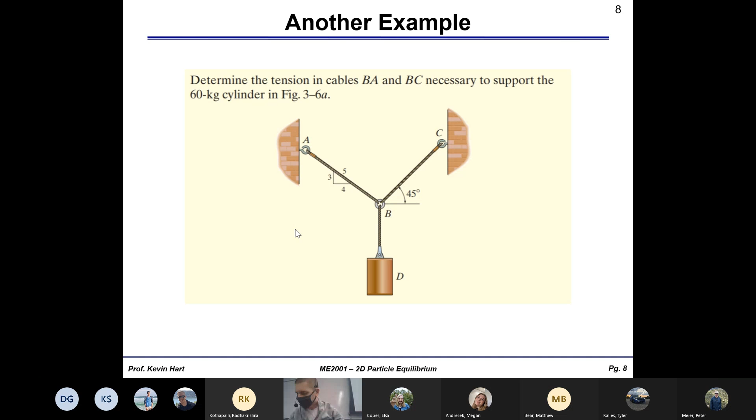Okay, I'm going to get this into OneNote.

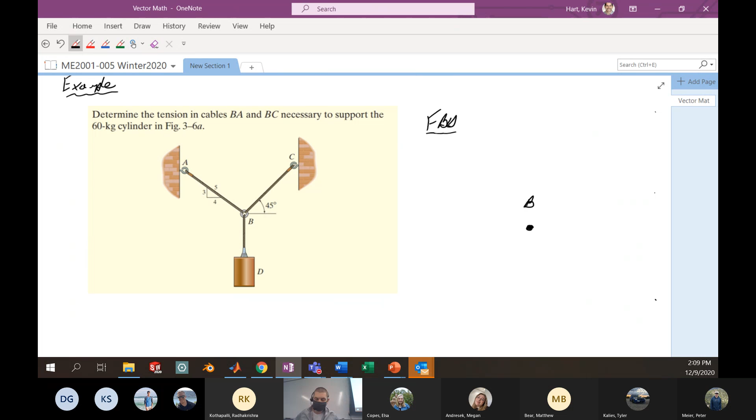Okay, a couple more minutes. Anybody got any answers yet? Still working hard and diligently in person.

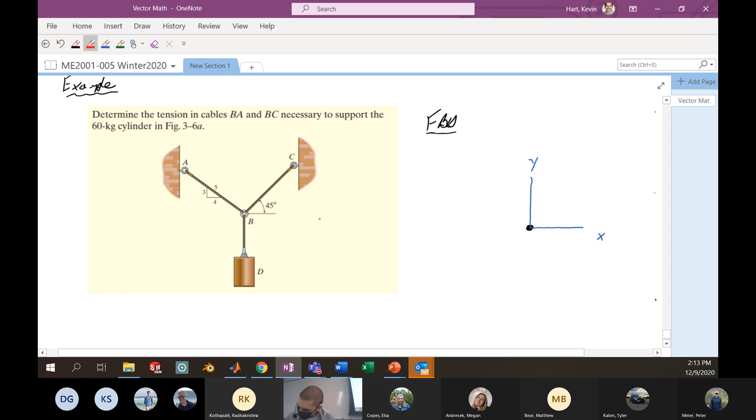So we have sum of the forces in x equals 0, sum of the forces in y equals 0. So what we want to do then is isolate point B by drawing a free body diagram. And remember that we label this as our space diagram. We want to convert that space diagram into a free body diagram.

The way that we do that is we're isolating this particular point by drawing this isolation circle around it and then accounting for all of the things that we're cutting through in our free body diagram. We can see here that if we're isolating this particular piece, we're cutting through this tension at BC, we're cutting through the wire at AB, and we're cutting through the wire at BD as well. So let's go ahead and investigate this particular point B, and let's do our free body diagram.

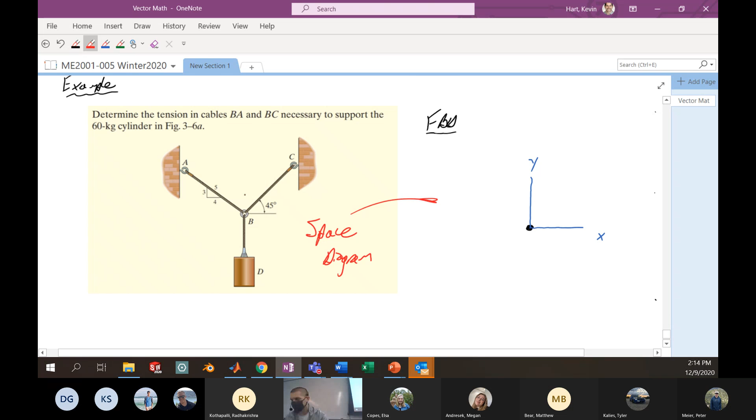So when we cut through each one of these particular wires, there's a tension or force associated with each wire that we can draw. The first one's pretty obvious, and that is just this tension downwards, which is the tension in wire BD. So you might want to label this as TBD, to be determined. Just kidding. Or maybe you'll just label this as the weight of this particular cylinder. All right, so we'll just leave that there for now.

We also want to consider what's going on at rope BC. So we can make ourselves an arrow to represent the tension in BC. Maybe we'll label this as TBC. You may want to label this as the magnitude of FBC. It's all kind of equivalent at this point.

And then lastly, you've got this tension that's kind of pointing backwards here, which is the tension between A and B. So here we got TAB. And let's be clear about some of the extra information that we know, like that this angle BC is 45 degrees with the horizontal, so that might be useful information to know.

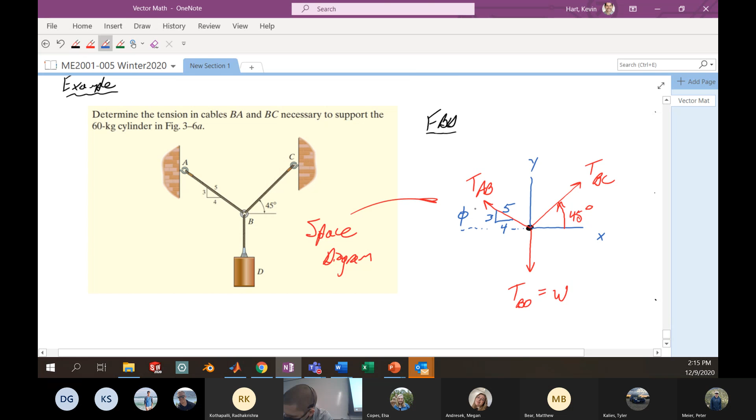We also know that this tension AB is forming a 3-4-5 triangle with the X and Y axis. That's additional information given to us in this problem. There's a couple ways to handle that 3-4-5 angle, but the best way is to assign this angle as phi, and we can solve for phi directly.

So let's note some additional information that we know about this free body diagram. I'd say this free body diagram is nice and complete, and it gives you all the information you have for the problem. You've got this angle phi, you've got the 45-degree angle for TBC, and we're on our way.

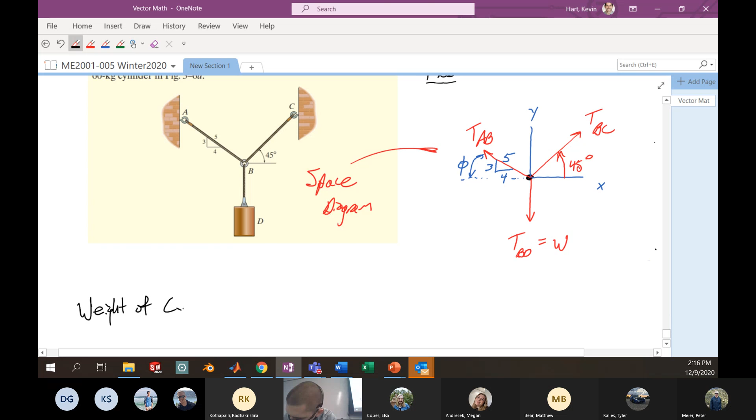One last thing we need to know is what is the weight? If you've taken any elementary physics class, you should know that since the weight is pointing fully downwards, the weight is just mg, the mass of the cylinder times the acceleration of gravity. The mass is 60 kilograms, so we have 60 kilograms times 9.81 meters per second squared. Working through this, we get the weight of our cylinder is 589 newtons.

That's a useful piece of information to know, and we can go with that straight away.

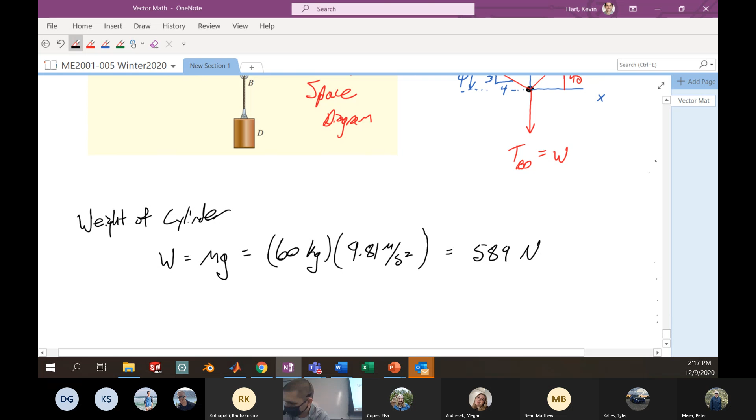Now we know that if our particle is in equilibrium, we have a mathematical definition for what that means: the sum of forces in x and sum of forces in y equal zero. So in equilibrium, sum of forces in x equals 0, and sum of forces in y equals 0.

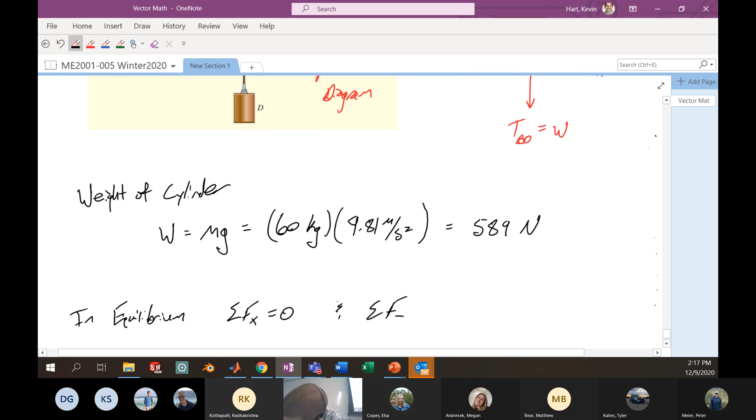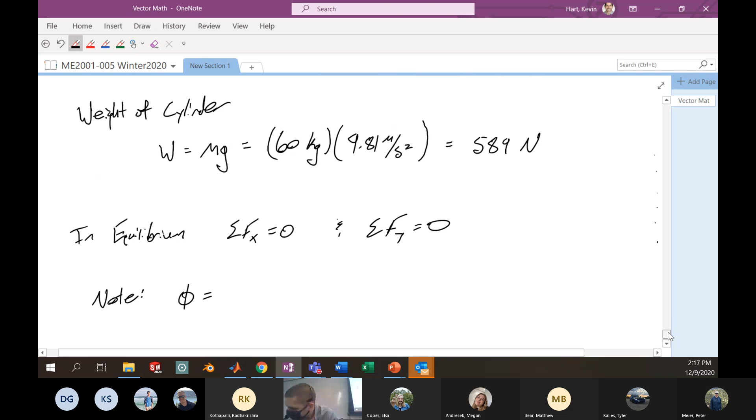We can investigate each of these directions straight away, but first we might want to calculate what angle phi is. If we go back to our picture, angle phi is the tangent inverse of 3 over 4, or if you want the sine function, sine of 3 over 5, or cosine of 4 over 5 — all going to get you the same thing. It's tangent inverse of 3 over 4, and we'll find that this angle phi is 36.9 degrees.

It's warmer than that outside right now. Dang, it's so nice out there right now.

Okay, so now we're ready to go. Let's do the sum of the forces in x equals 0.

Let's investigate what we've got going on here. Since this weight is fully in the y direction, we don't have any contribution of that weight in the x direction. All we really have to consider is the tension in BC, specifically the component of that tension in the x direction, and similarly the component of tension AB in the x direction. We'll resolve TBC into the x direction through cosine 45, and we'll resolve TAB into x through negative sine of angle phi.

So if we do the sum of the forces in x, you're going to have tension BC times cosine 45, minus tension AB, since it's pointed in the negative x direction, times the sine of angle phi, which is 36.9 degrees. This is equal to 0.

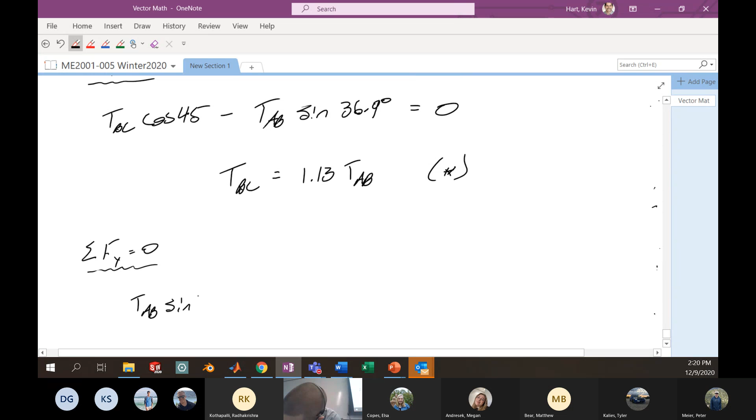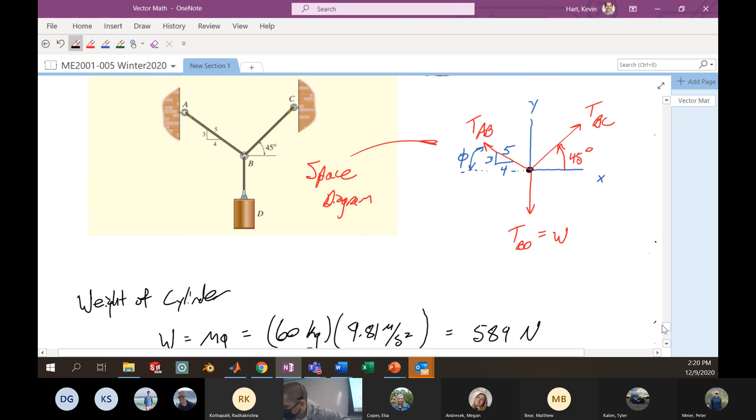Okay, so if we just peek our heads up for a second at this free body diagram, we're resolving this particular force, the y component of that guy, through the sine of this angle phi, which is 36.9. Note that it's in the positive y direction.

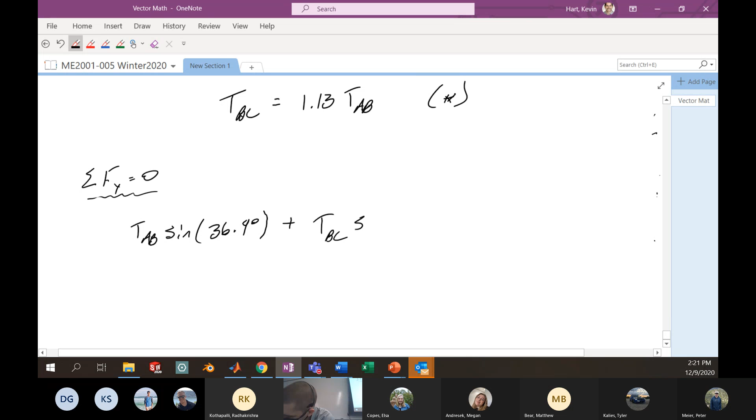And then we're going to add to that the contribution from BC. So also in the positive y direction is TBC, sine of 45 degrees. And don't forget to subtract the weight, which is fully in the negative y direction. All this together equal to 0 because we're in equilibrium.

So let's just go ahead and plug in information now, and we'll utilize this star equation here to plug in for TBC as we go through. So then we get TAB times sine of 36.9, which you can do yourself, is 0.60.

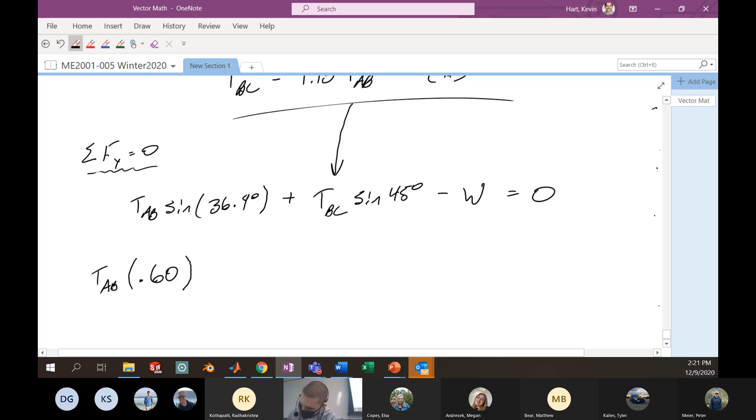And that sort of makes sense, it's 3 on 5. Plus TBC. So we're going to plug in for TBC here from above, that star equation, which is just 1.13 times TAB, multiplied by sine 45. Or if you want actual values, sine 45 is root 2 on 2, or 0.707.

Minus my weight, which I calculated before, 589 newtons. It's all equal to 0. So here now I've whittled it down to one equation, one unknown. So you can just use algebra to solve here and get that the tension in AB, once you make your way through the algebra, is 421 newtons. So there's your answer for the tension AB.

Okay, so that's kind of one component of this problem. We still need to solve for the tension in the other rope, tension in rope BC. So we can plug this back into that star equation above.

And we'll find that TBC is equal to 1.13 times that TAB, which is 421 newtons. So this will give you that TBC is 476 newtons.

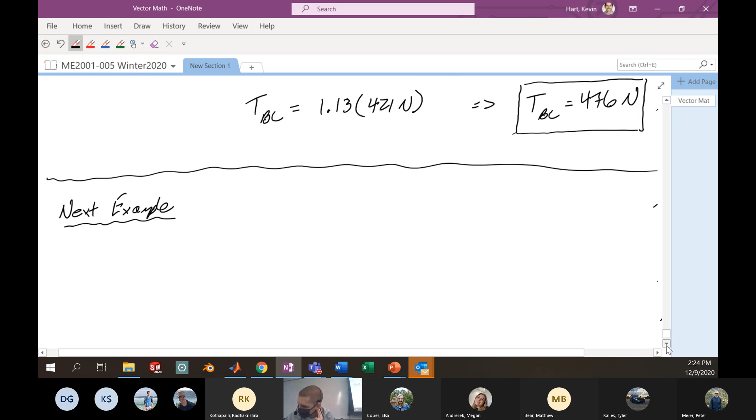This is going to look very similar. You're going to have a very similar procedure here, except you're just solving for different variables. So let's take a look at this guy.

So here's our next example. We've got a 200 kilogram crate, again this is a mass suspended using these particular ropes or this particular setup. Each rope can withstand a maximum of 10 kilonewtons before it breaks. Ooh, complicated. If AB always remains horizontal, you kind of see that in the picture there, determine the smallest angle theta which the crate can be suspended before one of the ropes break.

Hot dang, complicated. All right, so we'll give you maybe another 10 minutes here. Come back at 2:35 and I'll make my way through it. So give it a go, give it your best effort. Again here we've got this equilibrium situation, so carry your variables through and see if you can go ahead and solve for it.

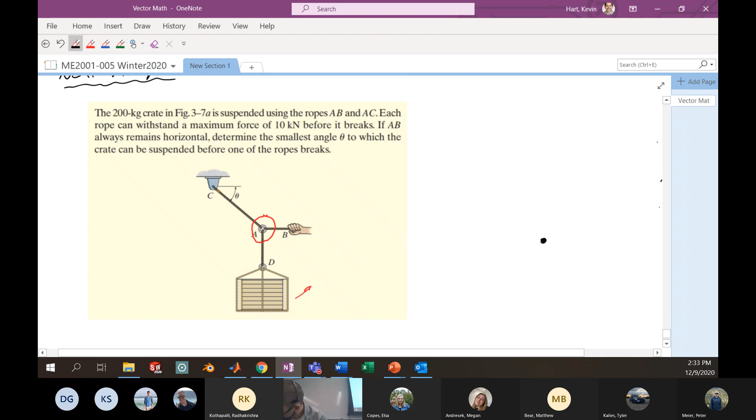All right, I'll give you maybe 2 more minutes, and then we'll give it a go. Okay, let's give this guy a go here.

So let's be a little bit more clear about what the question is asking. I think it might help to break this down a little bit more and think about what's going on. So the question is, each rope can withstand a maximum force of 10 kilonewtons before it breaks. If AB always remains horizontal, we want to find the smallest angle of theta which we can suspend this before one of the ropes breaks.

So in math language, what we're actually looking for here is: what value of theta so that my tension in AC, tension in AB, and tension in AD are all less than or equal to 10 kilonewtons. That's what you want. You want all of them less than or equal to 10 kilonewtons.

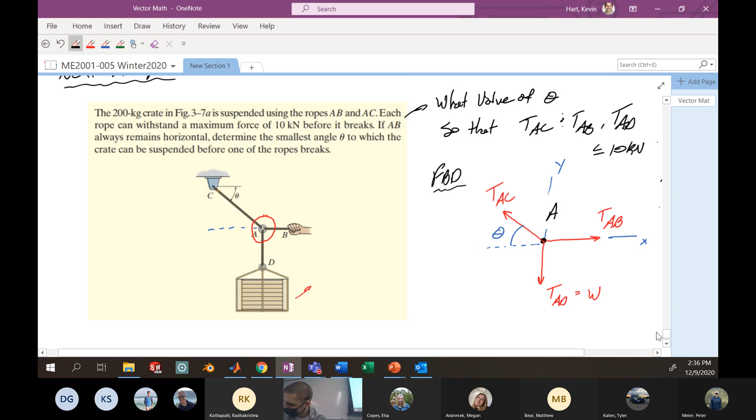And so if we draw this into our free body diagram, your angle of theta is here. So let's make sure that we get that correct straight away. You don't want your sines and cosines flipped, you're going to be in trouble, rawr, etc. Okay.

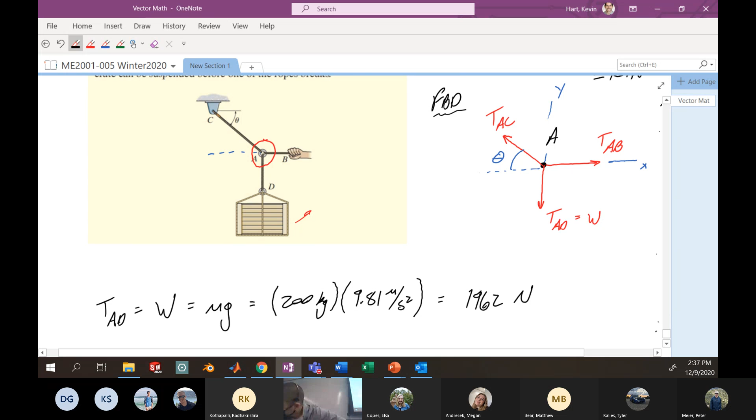So let's first examine what's going on in this rope here. I think it's pretty obvious what's happening here, so let's just go through that really quick. Obviously the tension in rope AD is just going to be equal to the weight of this particular crate, which is just the mass times the acceleration of gravity. The mass of the crate given in the problem is 200 kilograms. Multiply this by the acceleration of gravity, metric, 9.81 meters per second squared. So we work this out, we're going to get 1962 newtons.

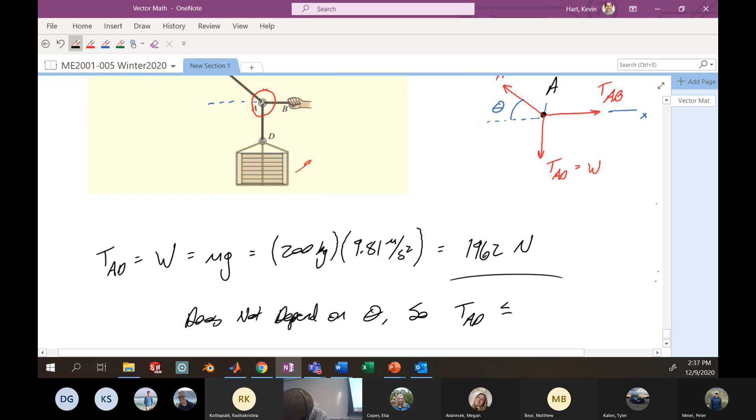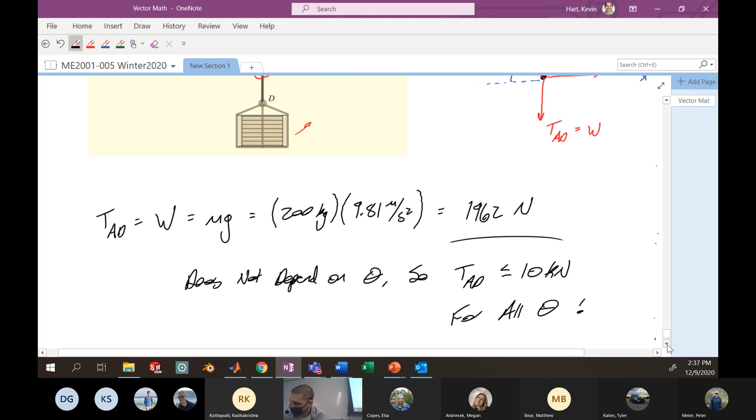Notice there's no dependence on theta for this particular value. The tension in rope AD is always going to be that value regardless of theta. So it does not depend on theta. This tension AD is going to be less than or equal to 10 kilonewtons always, for all theta. So we don't have to worry about that guy. There's no way that's going to be our limiting factor. I think you might be able to see or understand that straight away, but it's nice to actually put some math to it. But this is still a useful value for us to know, this 1962 newtons.

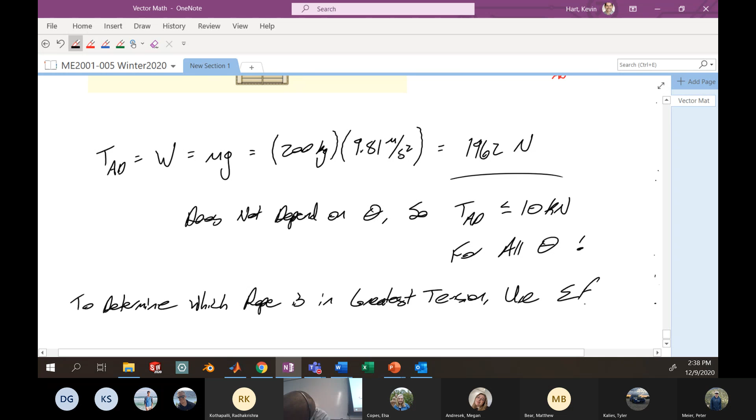So let's move forward and assume equilibrium is happening here. I'm going to establish a relationship between the tensions in rope AC and AB, because I want to know generally which one of those is going to be under greater tension. So to determine which rope is in greatest tension, we'll use sum of the forces x equals 0, and I'll show you what I mean. So let's enforce one of our equilibrium equations: sum of the forces x equal to 0.

If we do that here, our tension of rope AB, which is this horizontal force, is always going to be in the positive x direction. So we don't have to modify it by any angle. It is just TAB. So if we go back up to our free body diagram, it's in this positive x direction. We're not modifying by any angular value. So we just have this TAB in positive x.

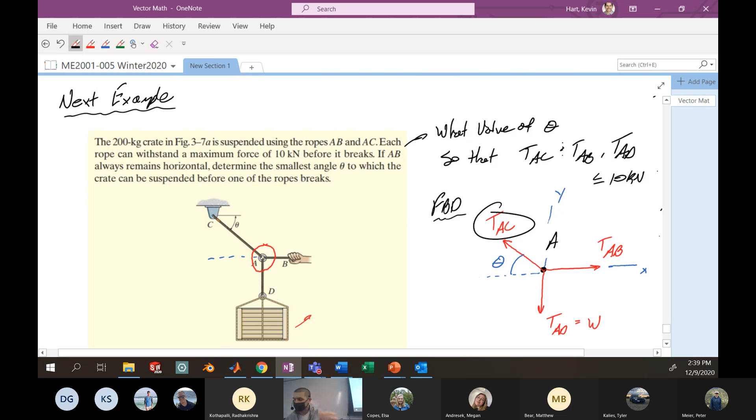For AC, it's pointing to the left, so the negative x direction, modifying by cosine of the angle theta. And theta we don't actually know. So here we have minus TAC times cosine theta. And these are the only forces that we have in the x direction, since the weight of the crate is fully in the y direction, it's not included in the x force summation.

So here we are in this particular situation. You can solve this for either one of the variables. I like to actually solve for TAC, which is a little bit strange, but I'll talk about why in just a second. You'll see here this is going to be TAB divided by cosine of theta. And here's a relationship that we establish, and one that just looks like a mathematical expression on the surface. But if you think about the range of values of theta that you could possibly see in this problem, it helps us understand which one of these two tensions is going to be greater.

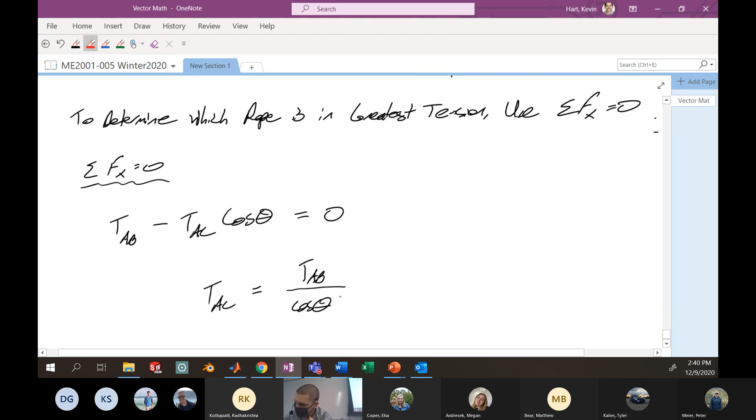So we can make a little side note here. Say that since the range of values for theta is, realistically for this problem, 0 to 90 degrees, we'll say since cosine theta is always less than or equal to 1, then TAC will always be greater than TAB. Hopefully we see that mathematically. That means that the rope that is governing failure in this problem is the rope AC.

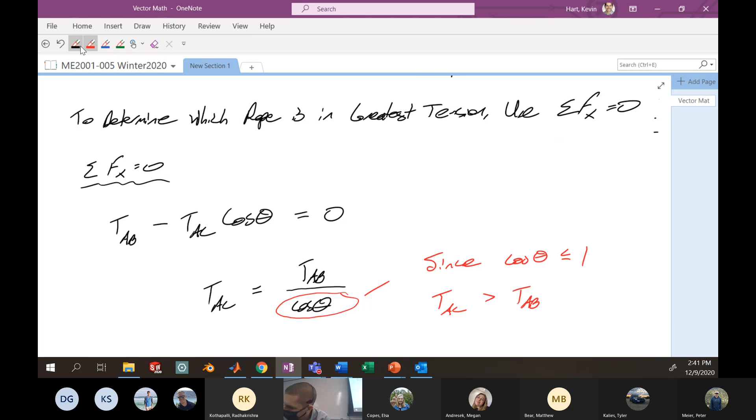So AC governs failure, and will be first to reach 10 kilonewtons. Okay, so some mathematical justification there. So what that means is let's set TAC as 10 kilonewtons, because that's when this is going to fail, and that's our failure condition. So when TAC reaches 10 kilonewtons, we're going to fail.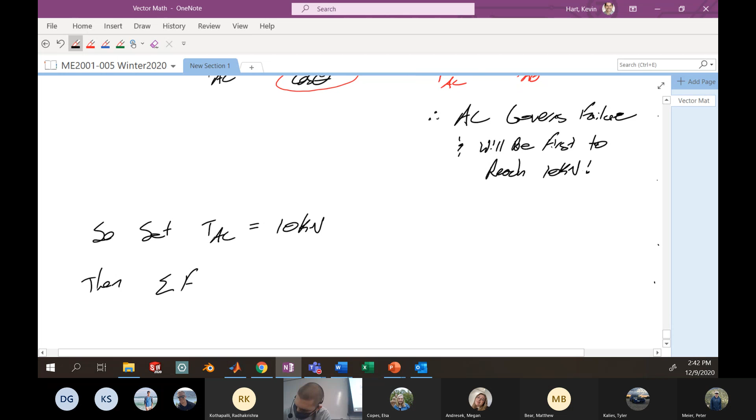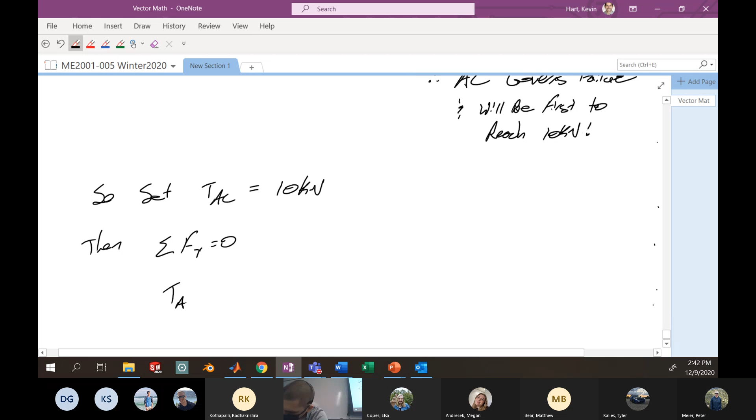Now let's do our sum of the forces in the Y. So if we sum the forces in the Y, we have that TAC, and here we're modifying TAC by the sine of theta, and it's in the positive Y. So TAC sine theta. Remember, the rope AB is always horizontal, so we're not considering it in the Y summation here. The only thing we have to consider is the weight of this crate. Minus W, this equal to 0.

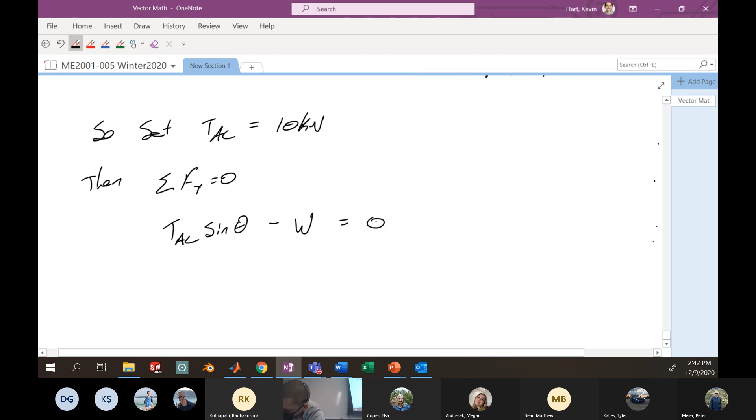Since we know that TAC is the limiting factor here, and we're setting it to 10 kilonewtons, we can just go ahead and solve this straight away. So TAC fails when this reaches 10 kilonewtons times the sine of theta minus my weight, which I solved for before, 1962 newtons, all equal to 0. Making your way through this, you find that theta will be the inverse sine of 1962 over 10,000.

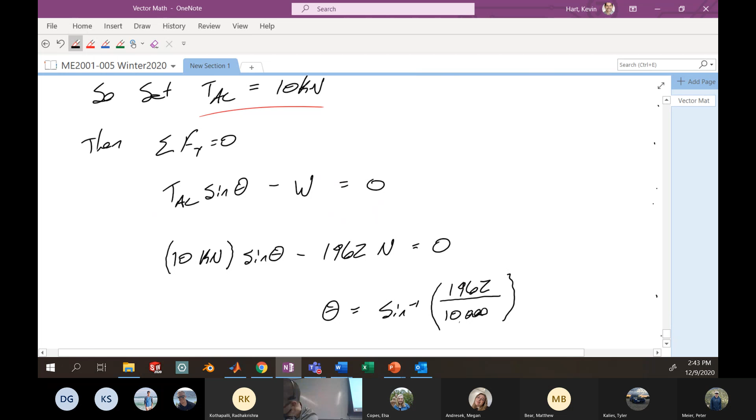Making sure that your units match, 10 kilonewtons is 10,000 newtons, so 1962 newtons over 10,000 newtons. This is going to be my expression that's dictating what theta is. And we can solve here and determine that theta is 11.3 degrees. And that is the answer for this problem.

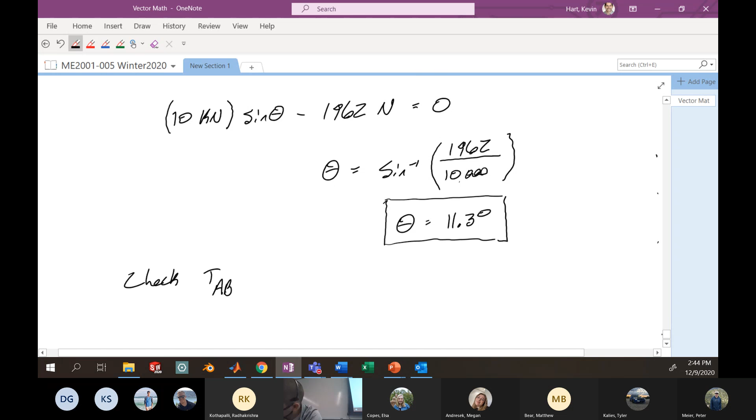We can check the tension in the other rope just to make sure that it is indeed less than 10 kilonewtons. So let's check: what is the tension in AB? And we can do that with our expression that we had previously, which is here.

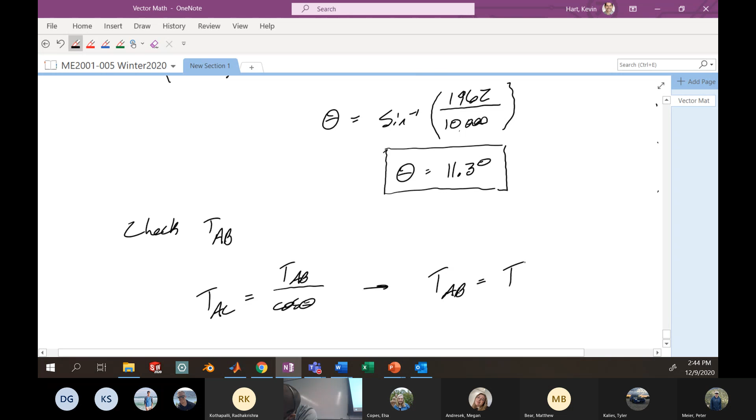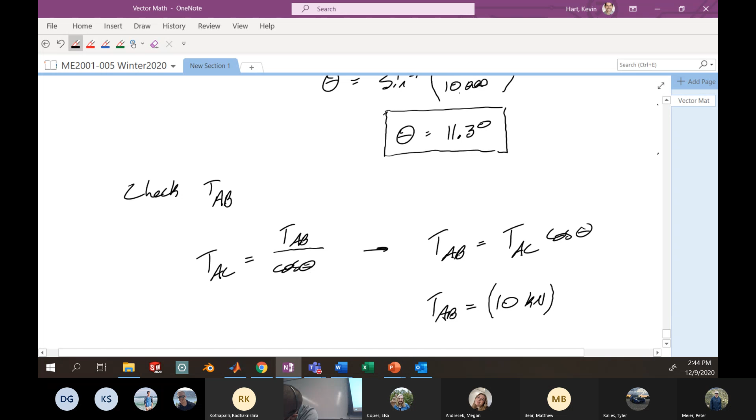Can rearrange this, and see that TAB, if TAC is 10 kilonewtons, multiplied by the cosine of 11.3, you'll see here that, yes indeed, we're going to be less than 10 kilonewtons, some percentage of that. Here it's actually 9.8. Okay, so this is a good check for us.